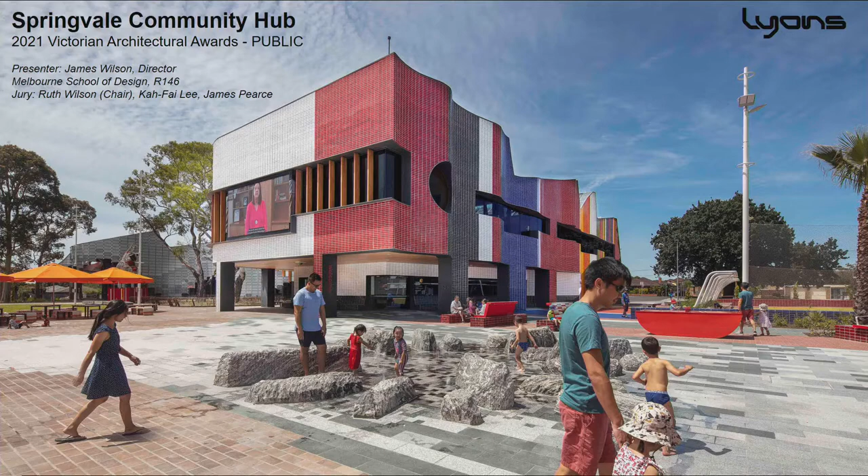So today I'm presenting the Springvale Community Hub, which really should be called the Springvale Library and Community Hub, which is a fascinating project for us anyway so far. So it's located in Springvale. Springvale, if you don't know, is in the southeast of Melbourne. It's on the Boonwurrung people of the Kulin Nation's land. It's quite a large site. It's about the size of the MCG, the actual site, but the building is just under 4,000 square metres in the middle of that.

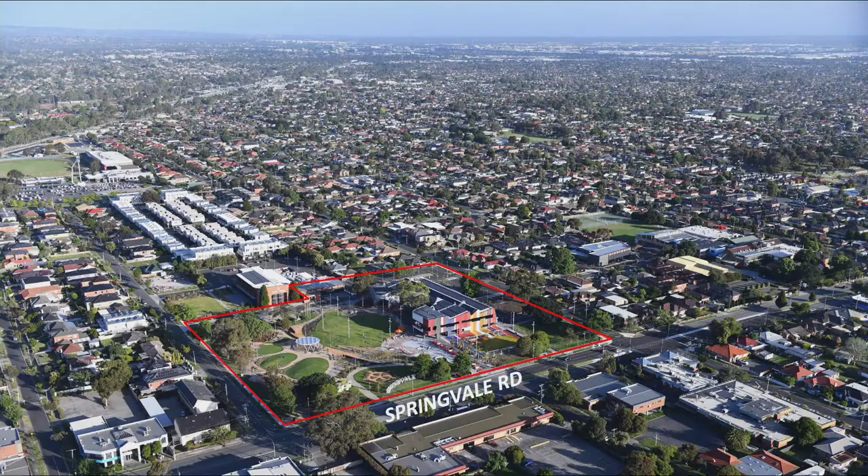Springvale, if you don't know, is made up of a very, very rich history of migrants that come into the area. I think Melbourne's become much more multicultural right across the spectrum, but Springvale, its DNA is a migrant community, even though that spreads lots of parts of Melbourne. And this really comes from the history of the Enterprise Hostel. So if you don't know, a lot of migrants who came to Melbourne came straight to this hostel in Springvale and therefore settled in the surrounding area. So the history of the Enterprise Hostel is very integrated into people's memories of Springvale and how they grew up in the area. And that includes our client, the council.

The council, a lot of them are first generation migrant leaders that came from Cambodia and Vietnam and Greece and lots of places and settled in Springvale and brought their families up here. So it was very part of our brief to respond to this. But interestingly enough, there's local heroes who are more white, I guess, migrants back in the 50s who were part of the welcoming committee. So there's a really rich history of welcoming and integration into the community from people who have been there a bit longer than others.

So the history of this project is that two councils amalgamated quite a bit of time ago into Greater Dandenong Council. The site right here used to be Springvale Council's hub. So effectively when that was taken away, the site was a bit of a hole in the heart of Springvale. And so the brief when we came to it, and it came through a national design competition, I should say, was one of civic generosity. They wanted to give something back to Springvale, to give them back their heart. And so it was an idea of a library, community hub, and a large urban space that people could use in lots of different ways.

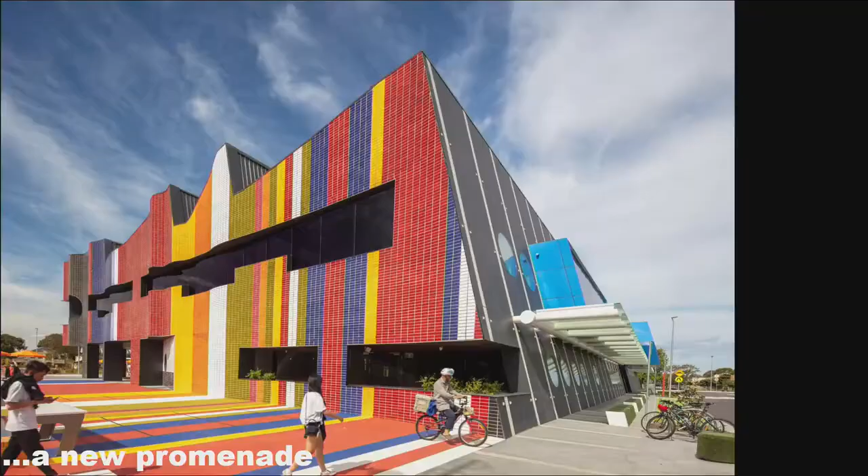So we wanted something that really created a bit of a joyful presence on the street. And one, a bit like a flag, was actually a fluttering presence, so it's actually bricks in a fluttering facade. And this creates sort of a new promenade along the front edge with some active courts I'll show you in a second, and a really sort of joyful entry into the library. Springvale Road on the left, the site's made up of lots of sort of historical titles. So just flip forward one. The main one being this civic sort of restoration that goes through to an existing town hall, which is here.

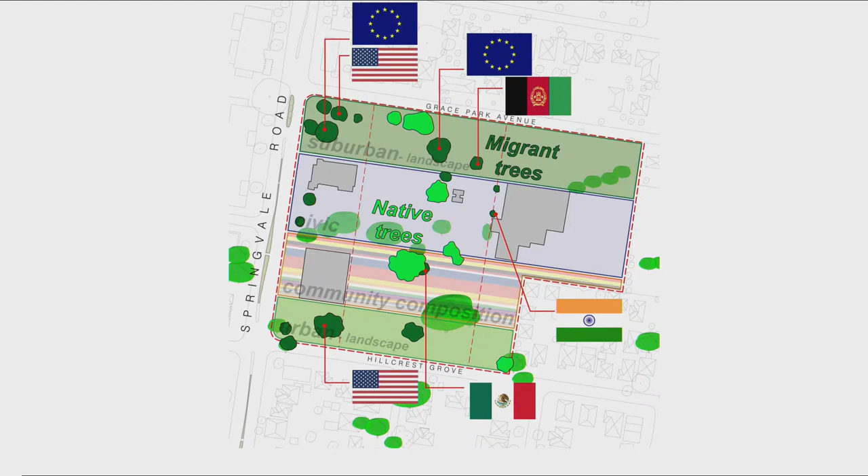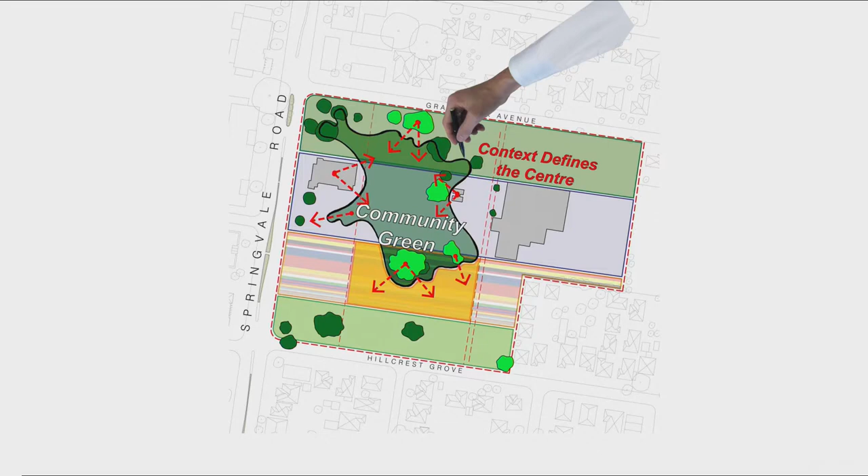And so when we looked at the site, we actually really were enamoured with all of these trees around the site, fantastic trees that we wanted to keep. Some of them native, but a lot of them migrant trees. And we sort of had this idea that we might link these migrant trees on the site. The building zone was set by a master plan, set back because the existing library was on the street, but also it was right on top of these fantastic river red gums right in the centre of the site, these ones here. So we proposed to create a community green, integrated these river red gums into the site, and also integrated this idea of the migrant path, which integrated all these migrant trees and new possibilities into a sort of circular motion around the park, around a central green.

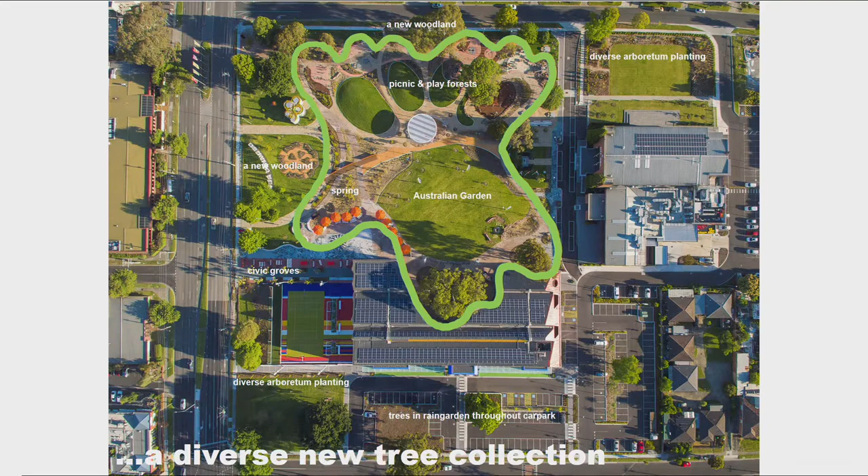So the site setup looks a bit like this now. The centre of the site, with Rush Wright Associates, with landscape architects, we made into an Australian garden, something with the idea of the spring from Springvale, picnic forests, the river red gums, and a central green. But around the outside, there's a whole diversity of uses to really cater for all ages of Springvale and lots of different cultural needs, from quiet reading spaces to smoke ceremony places to kids' playgrounds, picnic places, and so forth.

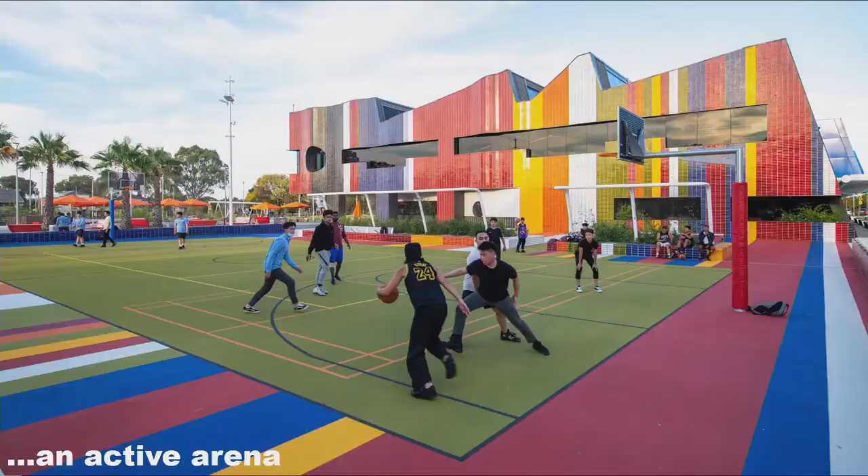And this is all set up by the central lawn. The central lawn can be floodlit at night, can be turned off, and they can show movies through this big rotating AV screen on the facade, and it becomes a big communal space next to the river red gums. But around it are other fantastic spaces. The youth are right into the active arena. This is right on Springvale Road. It's a new urban court next to this sort of colourful facade.

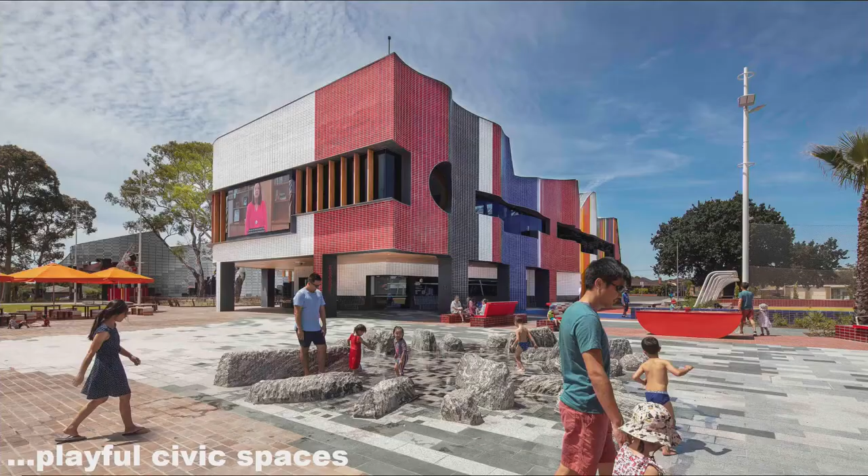The idea of a new gateway: this links the Springvale bus stop into one of the entries into the library, with lots of little game plays around here as well. And then the idea of being playful and whimsical, so places where kids can come, they can get a bit wet and play in the civic grounds.

Connecting with the Enterprise story was really important, so the idea of a rose garden was really part of the community's identity with the Enterprise. And we also got Material Thinking, Paul Carter, to get some artistic integration, one of them being the migrant stories of coastlines going through and slicing through the park and telling stories of migrants. We want to, sort of again, lift up the pride of Springvale, so the idea of having a bit of a Hollywood moment on Springvale Road.

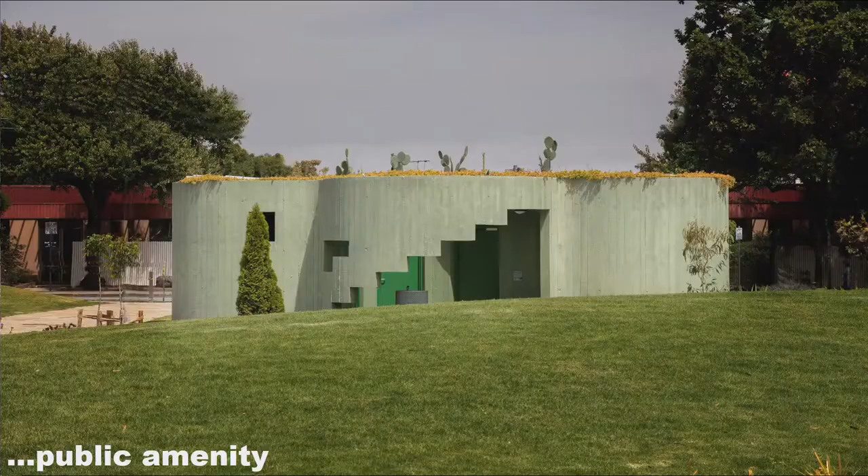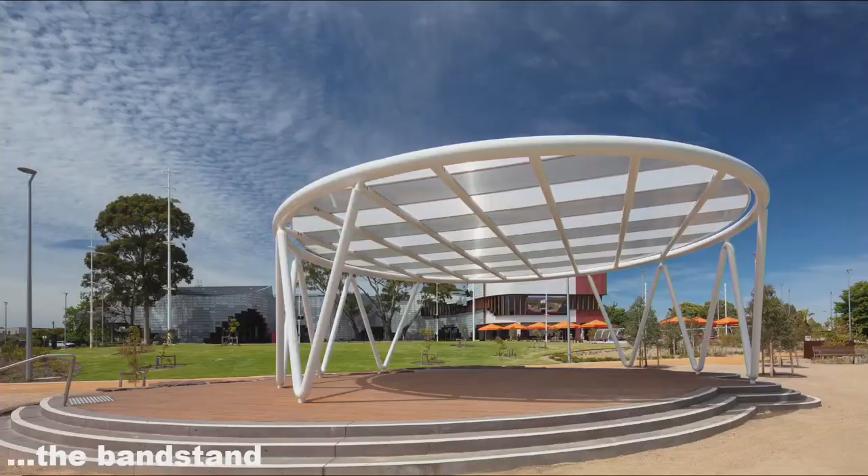And part of our commission was actually a few outbuildings as well. So one was a public amenity building, a communal wash area. It's designed a bit like a grotto with vines and things that will grow into it in the future, with a bit of an idea about sacred spaces inside. The bandstand again was another pivotal moment as you circulate around this migrant path for activities to happen. And then this undulating playscape, so bringing back the idea of Springvale not as a flat landscape, but one that was actually undulating and playful.

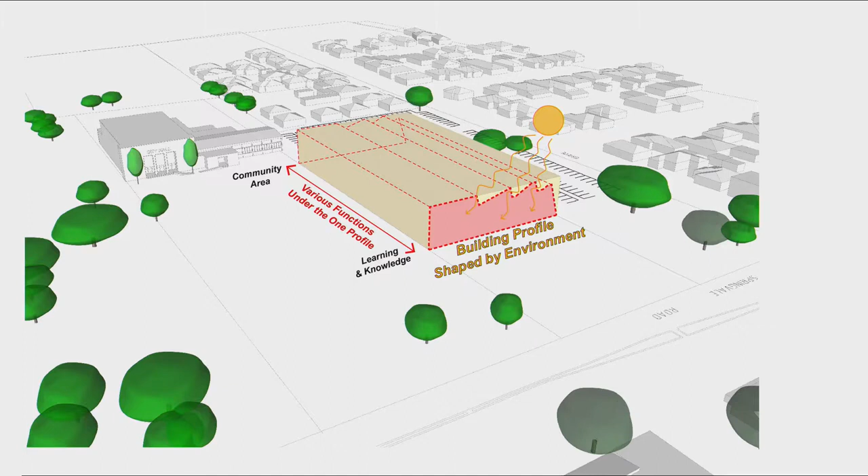And then lastly, the idea that the building itself might become a performing stage out into the central green in the future. And so we'll talk about the building now in itself and how we set up and how we thought about that. Firstly, it was a simple box to start with. It was shaped by the environment, so we wanted these big south clerestory lights to run through to get great natural light into the building. And then we wanted to raise the civic side and lower the suburban side to get this presence on Springvale Road and lower the profile towards the suburban edge on the eastern side.

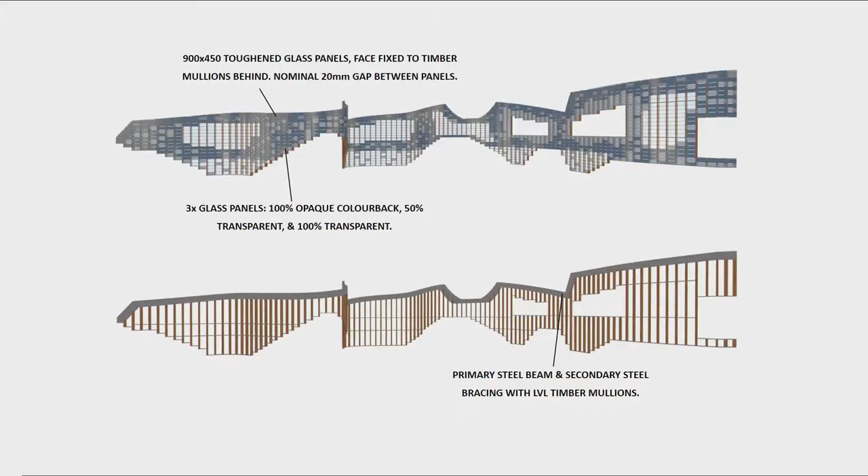And then, as you've seen before, we really want to keep the river red gums and get this into a communal green. And so the red gums really set the scene for the library. It's where you enter, you float around. The facade itself is made up of 450 by 900 fritted glass panels as a bit of a shading screen on timber struts. And what it creates is this beautiful dappled light that protects the northern edge of the building. It's a 6-star rated building, it's carbon neutral.

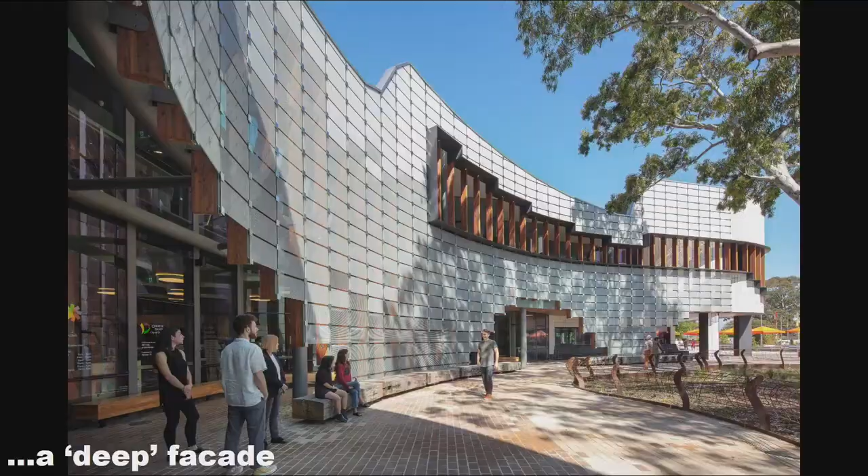This facade has a lot to do with that in terms of protecting the northern edge, but it creates breathing spaces and spaces where you enter and come out of the building in a really calm and reflective way. And again at night this facade glows with the interior aspects and creates very safe wayfinding for people around the site. The solar profile we talked about, so the south clerestory lights run right throughout the building, so on the interior you always get these fantastic clerestory lights that are actually acting as natural ventilation from the underfloor system into the skylights as well.

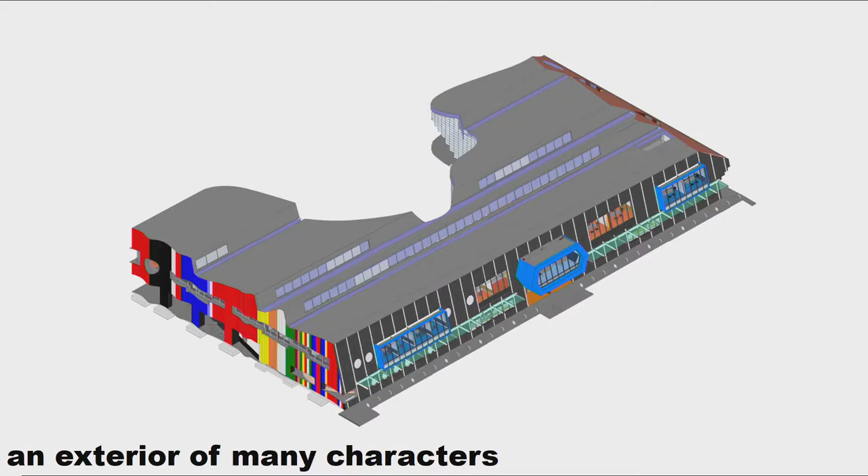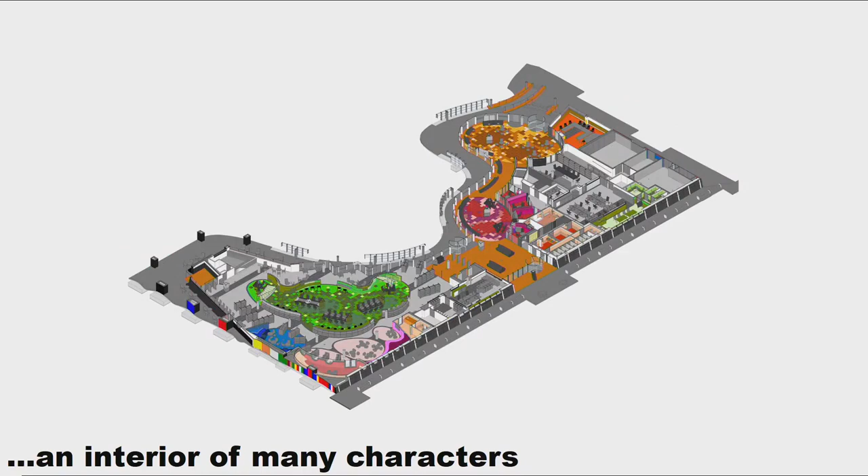The interior was again an interior of many characters. And again, there's lots of calm moments around. We're going to show you a lot of joyful moments, but a lot of the moments in between are very monotone grey spaces interstilled with these spaces between. And again, this is riffing off Springvale. It's a very vibrant community. You walk through Springvale Mall and it's a collision of cultures and colour. The setup of the building is there's 4 different entries into it. People come from lots of different ways into the building. You can go along the protected north and southern edges into it as well.

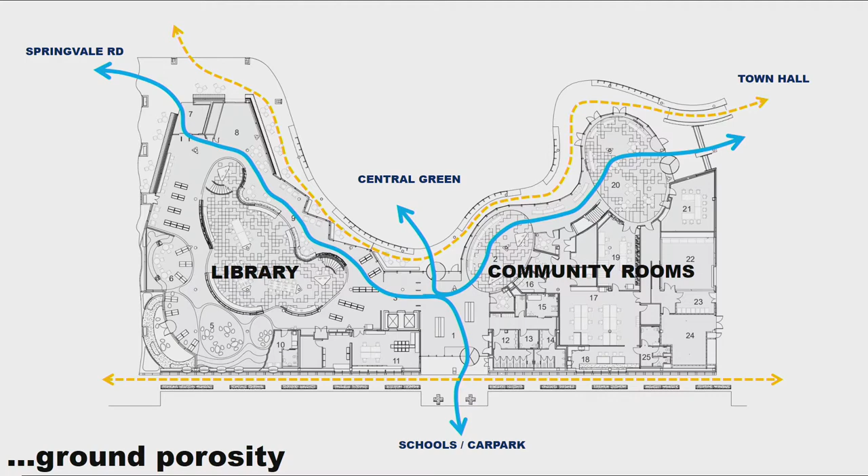It splits the library and community rooms. There's 3 great halls in here, the Technology, Community and Exhibition Hall. And again, they're extending the voids upstairs, surrounded by lots of community rooms. I'll just take you through what they are. So there's a technology hall around the library, around teaching people, learning spaces, reading balconies overlooking this, quiet study nooks on the outside. The central one is a service hall for the community to get help from the council. And the third one is an exhibition hall.

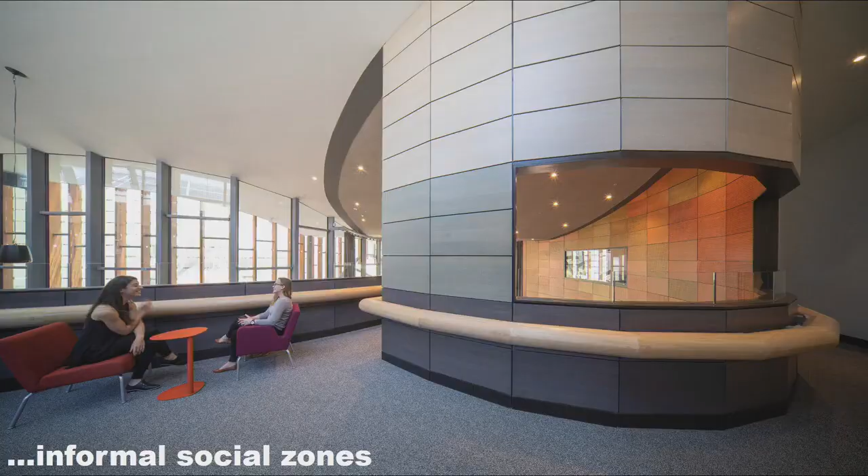And this has integrated art by Paul Carter again, a rose which is above you, and this idea of integrated welcome signage along the side. The last 3 spaces, there's a maker space, a youth lounge, which is like the attic lounge overlooking the park on the top, and a reading terrace as well off the library. It's really...